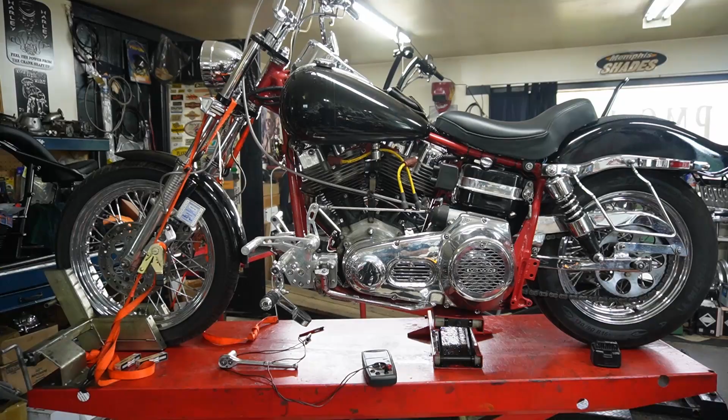I guess one of the things that keeps me working is I really enjoy working on these old bikes. Yeah, they're a pain in the ass sometimes and they're frustrating, but it's nice to see bikes that are kept in good shape with the old years.

Bike's got GMA brakes on it and a GMA master cylinder. Ironically enough, I look at it and I see my fork legs that I made many years ago. It has a set of those on it. So things have changed through different hands through the years.

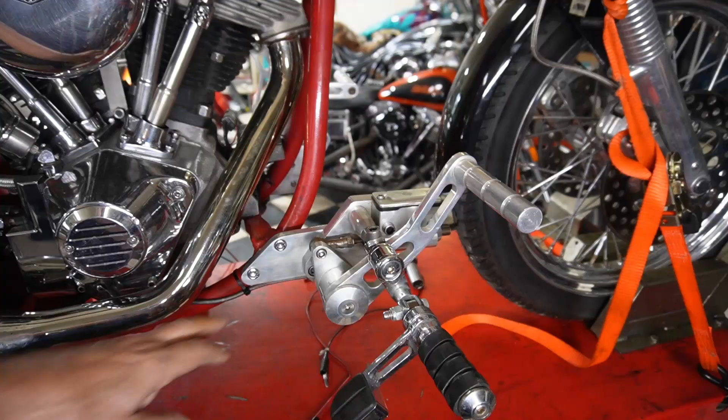We made the seat for it, and the gentleman that owned it was a big guy. So we moved all the forward controls ahead about 4 inches to make it more comfortable for him. This is the 4-inch extension plate where we moved everything out, and I made the forward controls for these again quite a few years ago. I believe he's 6'4", 6'5", something like that.

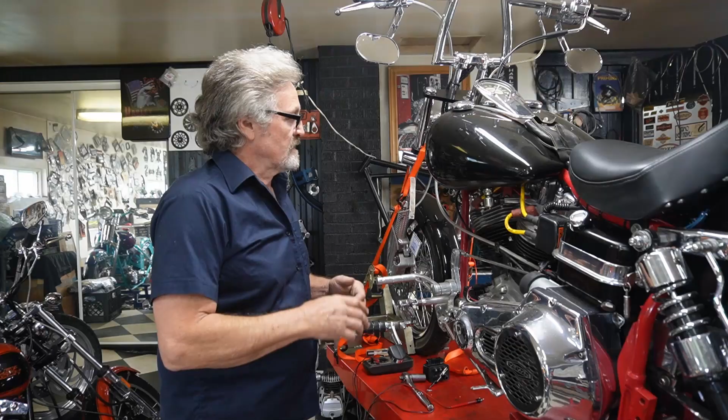So we've got a problem with it today. The front cylinder doesn't seem to be firing. It's a single fire ignition, so we're going to try and figure out what the story is on it. So today we're going to try to figure out why the single fire is not firing. The front cylinder didn't seem to be firing, and I fired it up and the front cylinder is cold. So we're not quite sure what it could be, but we're going to start with the easy things first.

So I'm going to start by taking the plugs out. That way we can turn the bike over. You want to check for spark. It's not going to start on you. Turn the gas off. So we're just going to take a plug and stick it in the wire.

Find a spot where you can rest the electrode on the motor here. I'm thinking I can reach. Yeah. All right then. Turn the key on. Grab this with these lady pliers. I'm just going to lay it against the head and turn the bike over. We got a nice fat spark there on that one.

So I know this plug wire is good and this plug is good, so I'm going to pull this one. Stick it in there, and I'm just going to do the same thing. Since I'm not firing the bike, it doesn't matter about order, but I know that the plug wire is good and the plug is good. We've got nothing coming up. She's dead in the water.

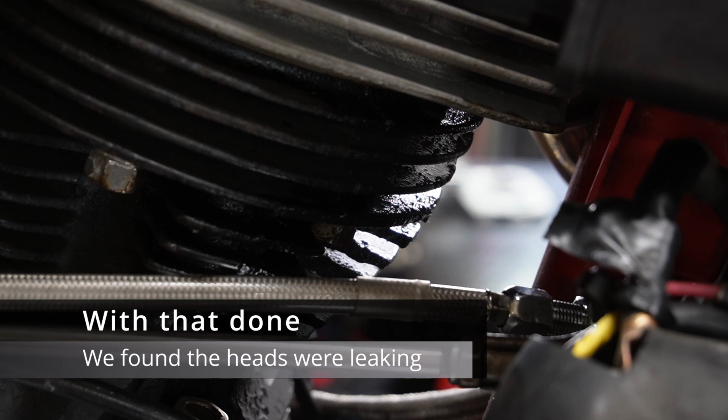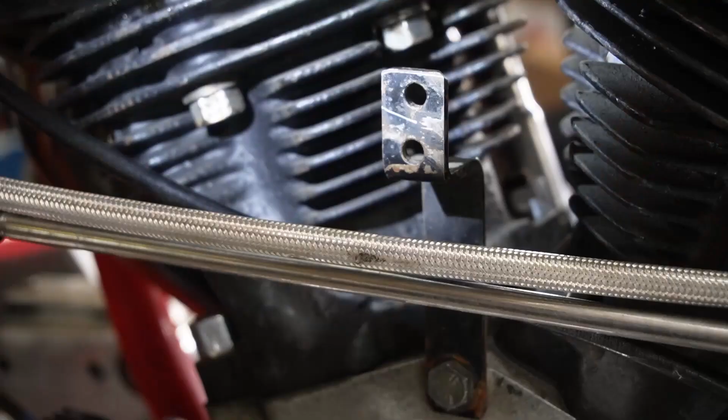So I started looking around, just checking over items that you might see. And as we looked in at the cylinders, we've got oil all around here running off, right in the head gasket connection there. We've also got it going on right here, it's all completely oily all across here. So it looks like the best thing for us to do is go along and retorque these heads down for the customer, check his base nuts as well. We'll take it from there to figure out what might be next.

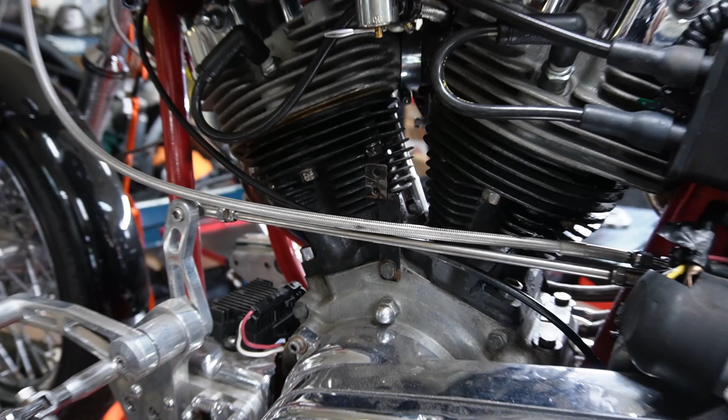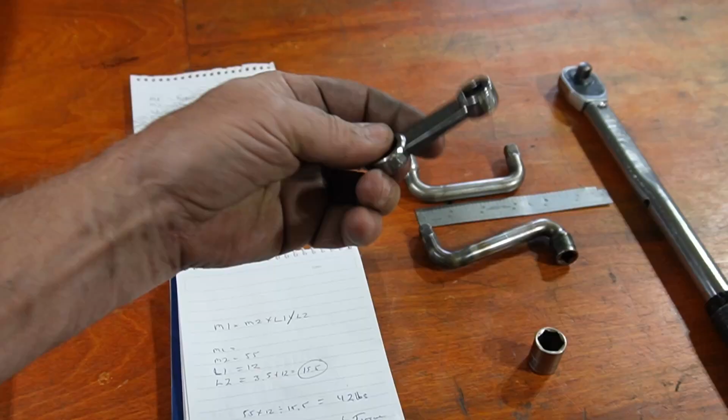So we've done a bunch of calculations and figured out our different torques for the different types of wrenches that we have and the extensions that we have to get in there. These are store-bought 9/16 Snap-on type of extension. They're great for getting in there. Sometimes if there's not enough space or the angle, we've made up these different ones. So I've stuck a socket on just a bar like this, the ends bent up so you can give them a pull to see what they're at, and they seem to be fairly loose.

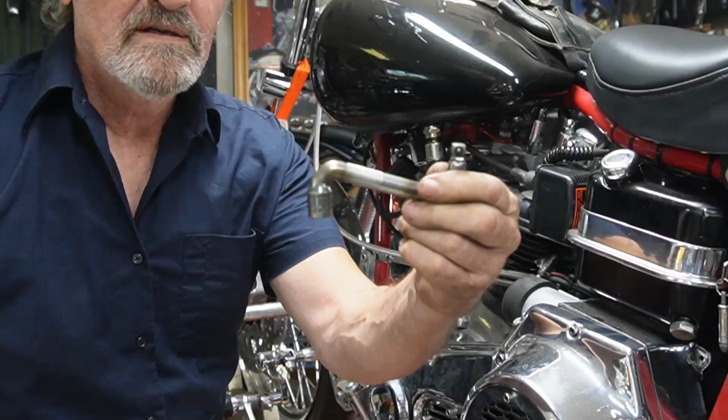So we've taken our calculations and figured out what we need to torque these at. I'm going to start at 55 pounds a piece and try to even it out all around because I have no idea really where it's at. So we've done the calculations on our torque wrench and we've set it at 42 pounds. That'll give us 55 when we're done. We're going to try to use our little unit like this, which allows us to put our torque wrench up in it like that, and we can pull and get the torque. Otherwise, upside down, it wouldn't be right.

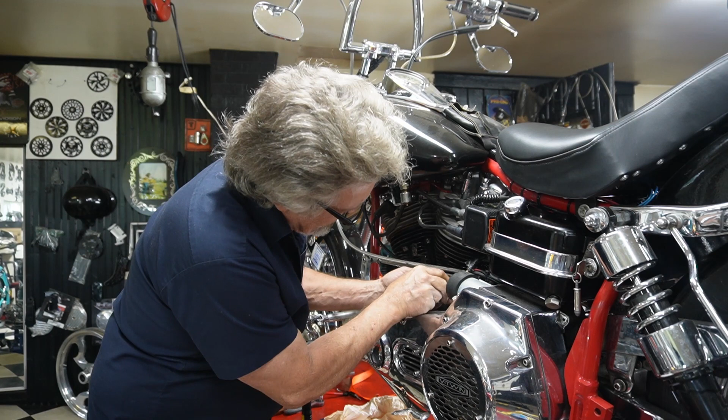We bent this up to use on different occasions like this, and it served us pretty well. Let's just try. If you're not quite where you want to be, just turn your socket around. One click, and that will change the whole general positioning of it. And right there, you're able to go up. So we can put our torque wrench. Before we do, take a moment to put this clean rag. That's what I brought it out here for. You never know what you drop and when you drop it. Okay, we're up on it.

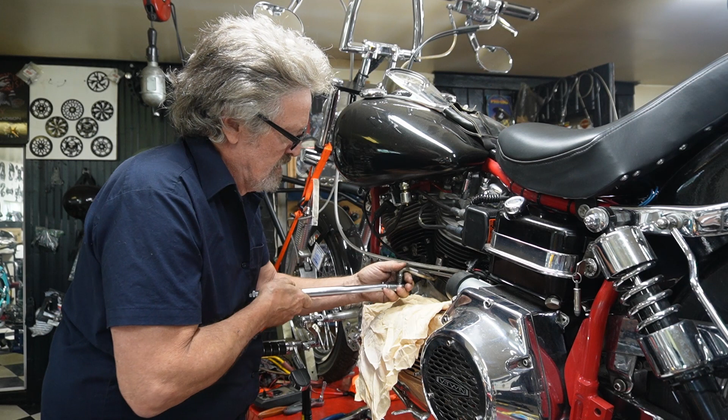That appears to be pretty loose. Get it right there. Okay, so there we are. Oh, they're always a real joy to get at. Now we've got a little longer socket to put on it to go around the shift rod. Once again, our torque wrench, and try to keep your torque wrench in line with your extension. If it's not in place, flick it around a couple turns so you can get it. There we go. 42 there. Okay. So we're going to go around and do the rest of the cylinders, and then we'll come back.

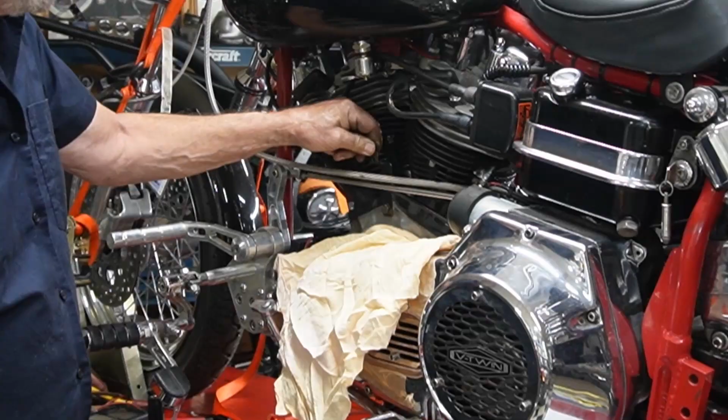So to be able to get at all the cylinder bolts, we may have to remove a few things. We've got this bracket here, which the cables were tied up to, and the bracket on the other side is held together by the center bolt here. Both of those have to be removed, especially on the other side where you'll have no swing at all. We've got a wrench on the other side. Pull that out far enough so that we know we've got the other side detached. So now we're just going to reach through here with this little adapter. Somebody's got a Torx type fastener on it. Gonna have to take that right out to get that bracket off and out of our way.

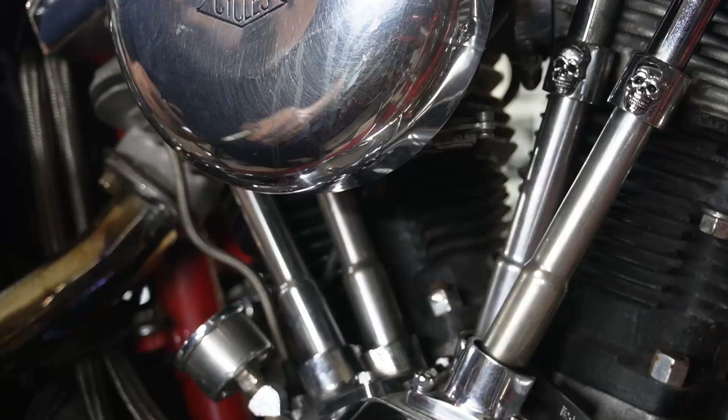Now we can go around and torque on the other side. This is where one of our small specialty tools comes in handy. Along with being able to torque, these bolts on the inside here are always hard to get at. With our little tool, we can get right up on it there to start with, get an idea of where we're at.

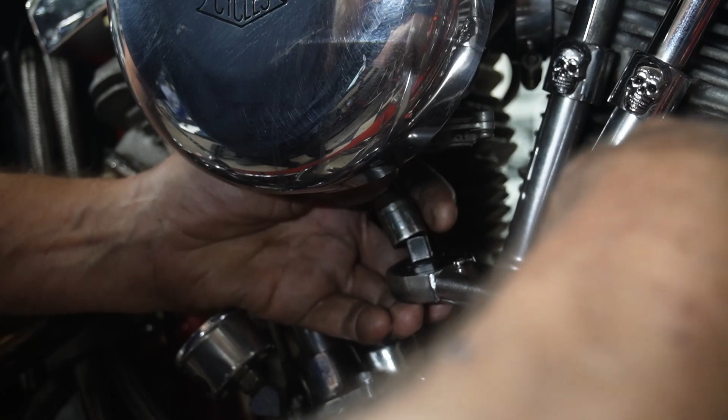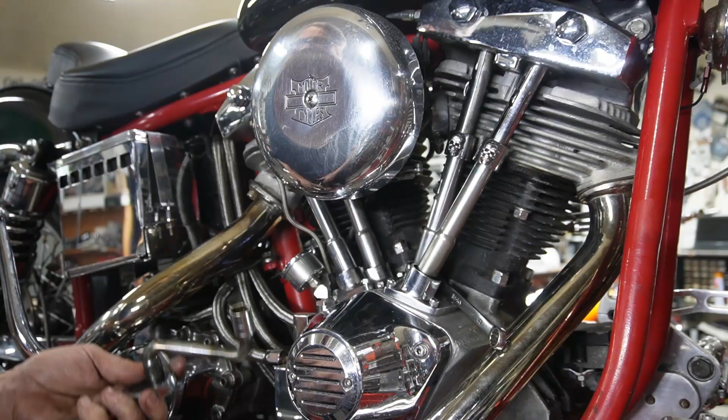There we go. Straighten that out. Make sure we're seated up there and give it a little pull. Well, that one's still good at 42. Try to get in here at the back one. A little harder to get a straight throw on it. On that one. And that one's tight.

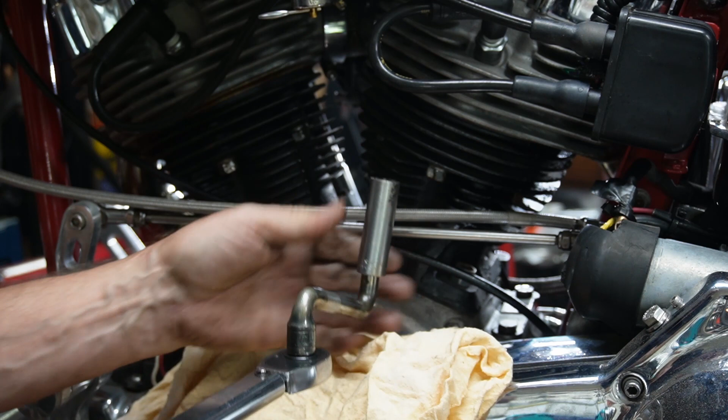So now we've set our torque wrench for 50 pounds, and that is going to give us 65 on the other end. So we're going to go around and do the same sequence that we did, starting back here with the rear one, which is usually the hardest. Turn the socket, one turn, gives you a little better chance of lining up. There we go. Okay.

So now we're just going to go along and finish up the sequence all around at 65 pounds and clean it off, and hopefully it had just started to leak and we got it in time. It should make a difference in any case, because it would certainly only get worse. So we'll finish that up. We'll check the base nuts as well as we're going, and we'll get back to it. That should be it. Last one.

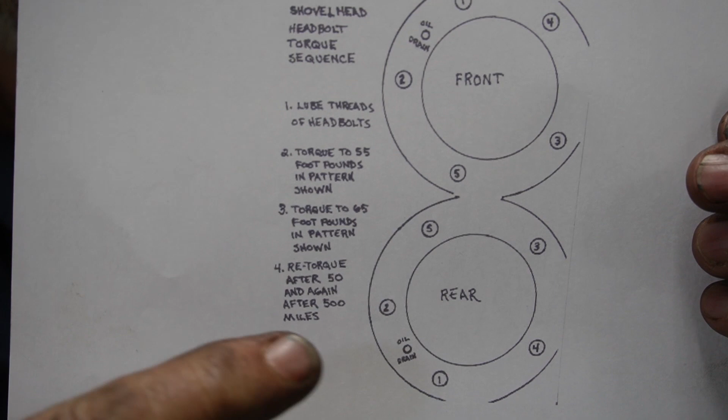So this is a little sheet on them. I just downloaded it off the internet, and I've always kept it handy. That gives you an idea of a torquing sequence. And as you can see, it's closing up the oil holes first, right? 1 and 2, pulling it down tight there and then torquing around. Yeah, it's a great system, and it works really well. I've had good success with it, so that's all I can say. It's not the only way to do it, but it's worked for me.

So some of the uses for these little wrenches are quite handy. As you've seen, this one that we could use the torque wrench with, because the end of it is upside down like that. We also have this one here. And this one can also be very handy for getting into places. Getting in underneath, such as that. You know, just gives you that little bit of extra.

You can't use your torque wrench unless you have a torque wrench that pulls in that direction. But in those kind of uses, a person can use a bar wrench, one of these. And you can also pull on that there and get your torque pounds off of this in a bit. So they're very handy. There's a little Snap-on one. They're readily available. Well, the problem with them is, though, in some cases, they will go up here and fit on, and you can put your torque wrench on them, and that's great.

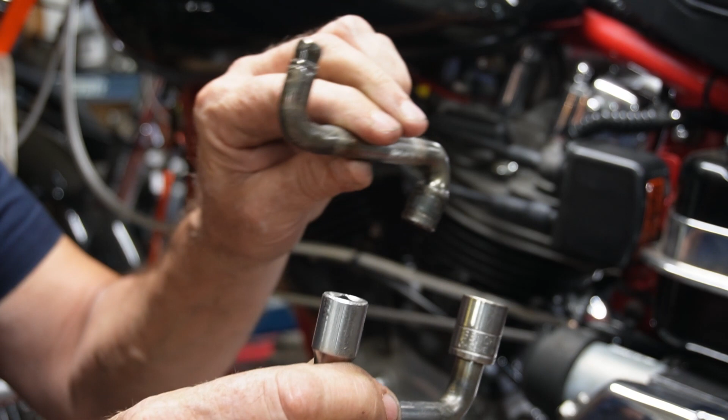All right, let's give her a go. She don't run too good when she runs out of fuel. All right. Happy camper.